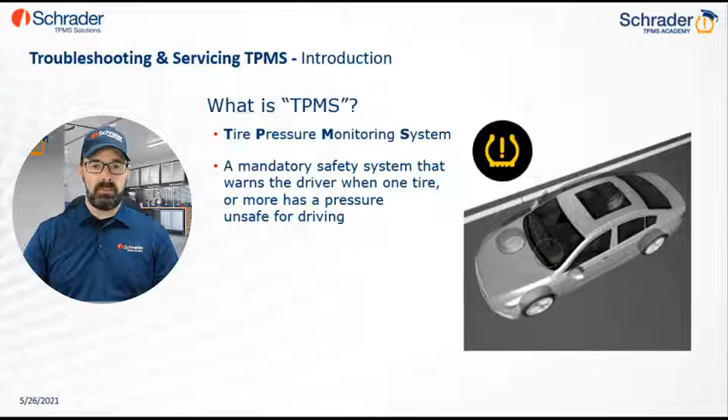As mentioned, it is a mandatory vehicle system, and it is mandated in the United States since 2007. What are the key points of that legislation for you? First of all, the legislation will target all passenger vehicles, light trucks, and buses under 10,000 pounds. Motorcycles and heavy-duty vehicles are excluded, but keep in mind that TPMS has proven its value to a point where we are seeing more and more motorcycles and heavy-duty vehicles now equipped with TPMS, even though it's not mandatory for that type of vehicle. The vehicle must be equipped with TPMS for all 4 tires.

The spare tire is not required. Again, it's not because it's not legislated that it doesn't exist. So keep in mind that some vehicles may have TPMS sensors in the spare tire, especially a vehicle with a full-size spare.

TPMS must alert the driver when there's a system malfunction, and a TPMS must detect and warn the driver when the tire pressure is too low, which of course is the goal of TPMS.

So how can you know? How can you identify which vehicle has TPMS? Let's say you have 2 cars in your shop, how can you know this one has TPMS and this one doesn't? Well, there's a few indicators that you can check. You can check with the vehicle year. So if you were paying attention for the last few seconds, you know that TPMS is mandatory in the United States since 2007.

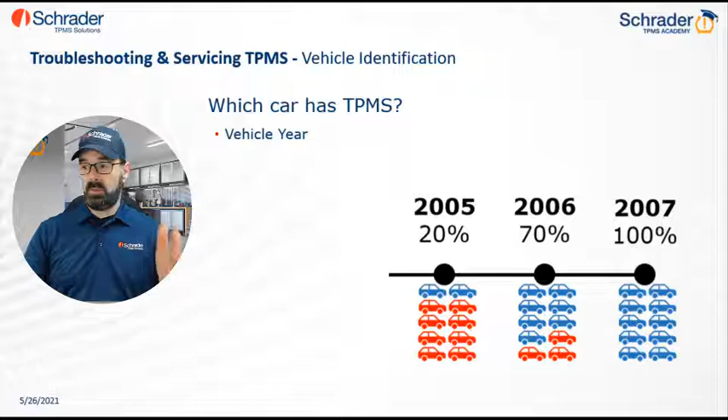So we can safely assume that any passenger vehicle built after September 2007 has TPMS. But what about vehicles built before that? Keep in mind the first car with TPMS was back in 1985. So between 1985 and 2007, how can you know which one has TPMS and which one doesn't?

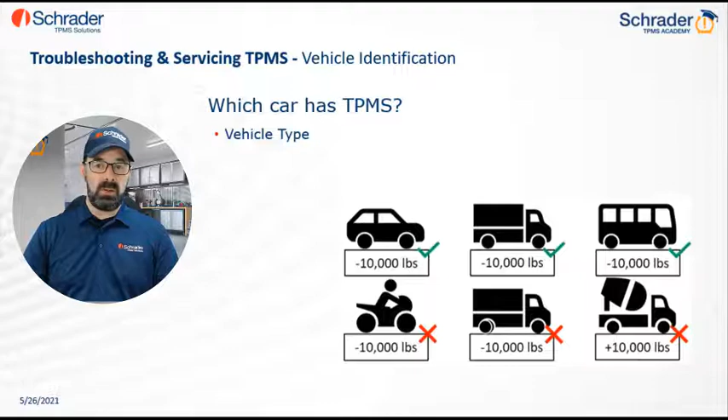You can also go by the vehicle type. So a mix of vehicle type and vehicle year will give you a good indicator. TPMS is mandatory for passenger cars, light trucks, and buses under 10,000 pounds. Motorcycles and heavy-duty vehicles are excluded, but we're starting to see more and more of these vehicles now equipped with TPMS.

So a good indicator would be the vehicle valve. Typically the valve is a good indicator. A metal stem valve will typically have a TPMS sensor attached to it, but some rubber stems also have a TPMS sensor attached. You just need to know how to recognize them.

Of these 3 types, the first type has a longer brass neck. By loosening the valve cap, you'll see the rubber doesn't extend all the way to the end of the thread - that's a good indicator there's a TPMS sensor attached. The second and third ones have a small rubber ridge, circular or longitudinal, directly on the rubber stem, which can also guide you. Seeing any of these 3 rubber stems is a good indicator.

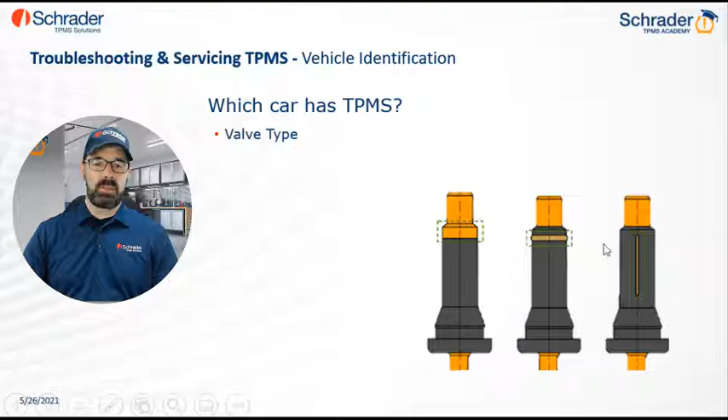But there's a better way. The most efficient and quickest way to identify if your vehicle is equipped with TPMS is to look at the dash. You want to look at the dashboard, and when you turn the ignition on, see if all the lights in your dash illuminate for a few seconds and then shut off. That's called the bulb check. You want to identify if there's a TPMS light during that bulb check.

If a TPMS light illuminates with all the other warning lights and then goes off, this means the vehicle is equipped with TPMS and the system is working properly. If the light stays on, or starts to flash, you'll want to write this down on your work order, because sometimes the client will claim the light was off before you started working on the vehicle, and if you haven't checked the light before, you're stuck with the problem now.

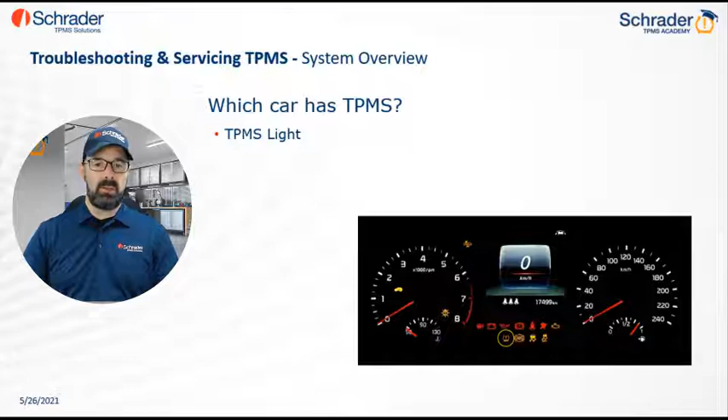All right, so that's for vehicle identification. Let's do a quick overview of how the system works. Now that you know that seeing the light in the dashboard tells you the vehicle is equipped with TPMS - but does it mean it has sensors in the wheel?

Not necessarily. What you need to know is there are 2 types of TPMS systems: direct TPMS and indirect TPMS. Let's start with direct TPMS for this exercise. Here's how it works: the pressure sensors are installed in each of the tires, and the sensor's job is to transmit pressure, temperature, and sensor ID.

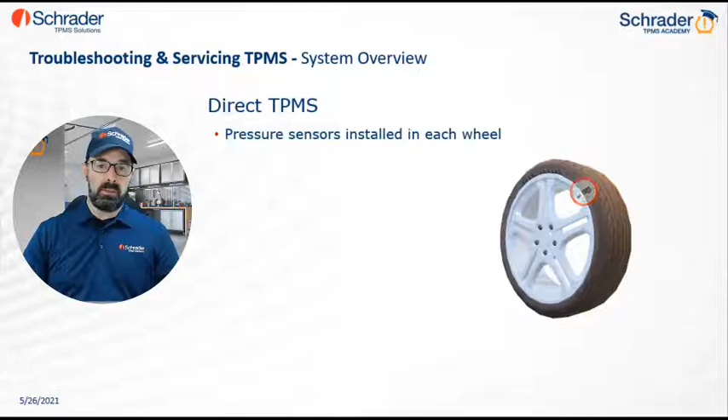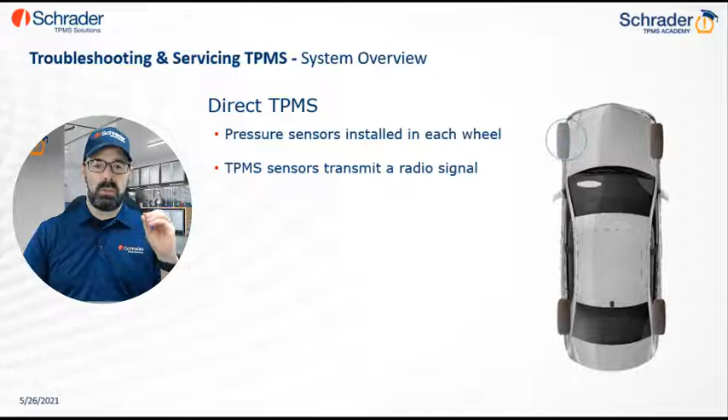The wheel of the vehicle is installed on the vehicle, of course, and when the sensor detects wheel rotation over a certain miles per hour, it will send a radio frequency to communicate the TPM data to the vehicle's receiver. The receiver gets the information and transfers it to your vehicle's ECU, the computer of the vehicle, which then displays that on your dash. So on your dash you'll have all the information, pressure by location - which wheel has 32 psi, which wheel has 33. That's how the system works.

Whenever the air pressure in one of your tires deflates rapidly, or if the pressure gets too low to a point where it's considered unsafe for driving, the sensor will send an alert to the computer in order to turn on the TPMS telltale, the solid TPMS light. But how much air do you need to lose in one tire to be considered unsafe for driving? The answer is 25% under the recommended tire pressure - that's when the sensor will send an alert to the computer to turn on the telltale.

That TPMS light, the solid TPMS light, is going to stay on, and it's going to stay on solid until the pressure in that tire is corrected.

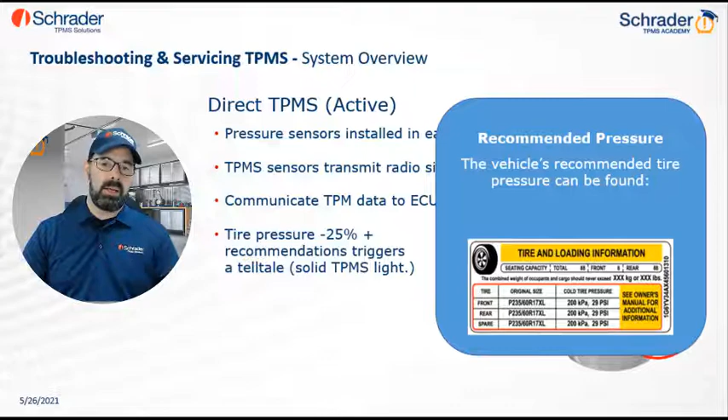Key information: 25% under the recommended pressure. But where can you find that recommendation? On your information placard, usually located on the driver door pillar - the same placard you would check to know the recommended tire size. That's where you'll find the recommended pressure for the vehicle, which is what the vehicle computer will set as a tire pressure expectation. So whenever the sensor reports pressure 25% under that 29 psi, the computer is programmed to illuminate the TPMS light on the dash.

And that's how it goes. Each sensor will transmit data every few minutes or so, and will continue to transmit unless the tire stops rotating. If the vehicle doesn't receive information from one or more sensors within a certain time frame, the vehicle will turn on the malfunction indicator light. It's the same telltale light, that same TPMS light, but it's going to flash instead of being solid.

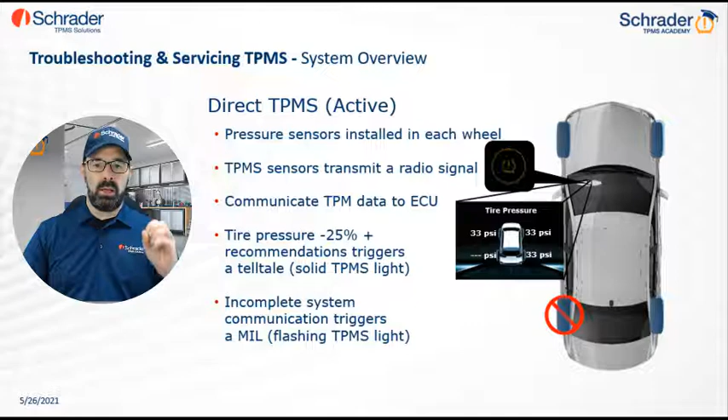Here's a trick: every time you turn the ignition on, the light will flash 60 to 90 seconds and then remain solid. So it's really important to look at the light at ignition. If you check the light 60 seconds too late, you might be missing important information.

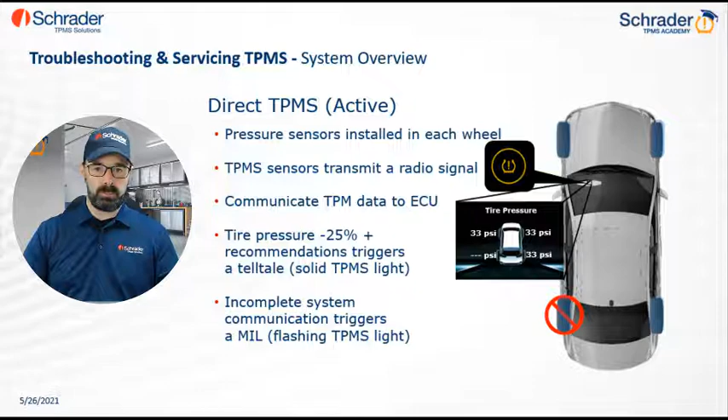That's for direct. Now for indirect. Indirect works on a different system - it works differently. There's no sensor installed in each wheel. The system uses the ABS speed sensor to estimate the pressure inside the tire. When the air pressure drops in one tire, the overall diameter of that wheel will slightly reduce to a point where that wheel will start to rotate faster than the other ones. When the ECU captures all that, it's able to understand that one wheel is rotating faster than the others. That's how the system will assume this tire is running low on air.

But it's the same light. It's a different TPMS system, but it uses the same light requirements: solid light if it's a pressure issue, and a flashing TPMS light if it's a system malfunction.

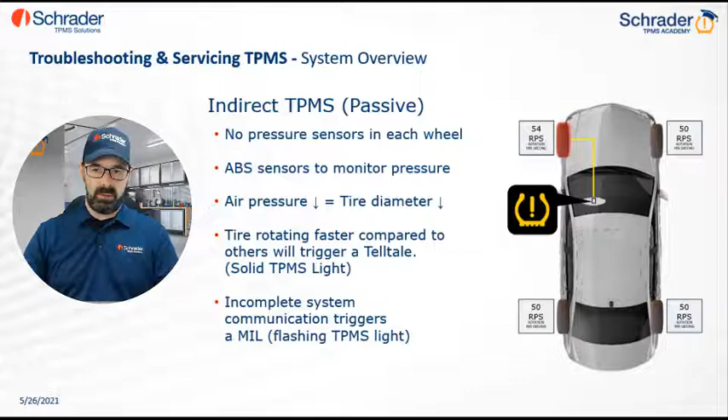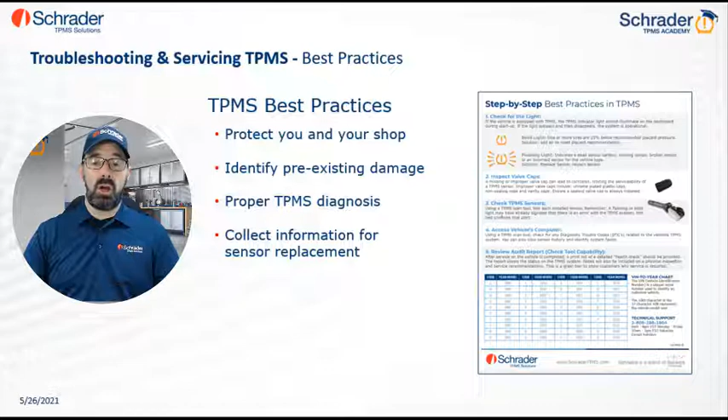So now that you guys have a better idea of how the system works and which vehicle has TPMS or not, I want you to go through a quick 5-point checklist that you should do before servicing the vehicle. This will protect you and your shop from liability. With that, you're going to be able to identify pre-existing damage, ensure that you inspect every aspect of the system, and ensure that you collect all the information you need if ever you need to replace a sensor.

And the first item on the checklist is exactly what we've just reviewed: check the light. When you turn the ignition on and all the lights in your dash go on, then off, that means it's a bulb check, meaning your vehicle is equipped with TPMS and the system is properly functioning. If the light turns on and stays solid, what you'll want to do is do a full ignition cycle again - off and then on - just to confirm the light is really solid and not flashing.

If it stays on solid, what you'll want to do is check the pressure value on your door placard, then check the pressure in the tire with your stick gauge. Don't forget to check that full-size spare - if the vehicle is equipped with a full-size spare, there's a strong chance it has TPMS sensors in the spare.

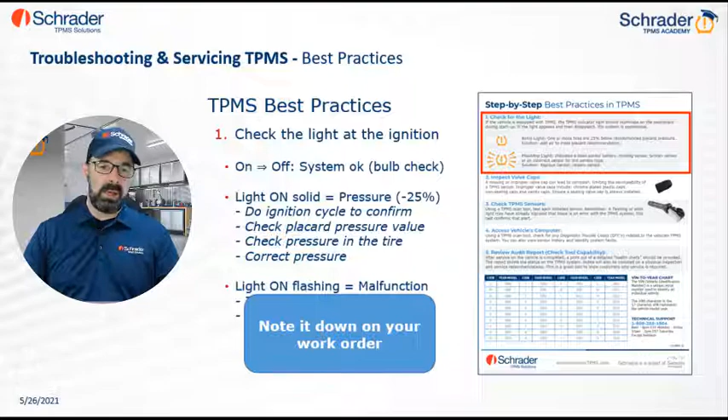If the light is on and starts to flash, then you know it's a system malfunction. In that case, test each of the sensors with your TPMS diagnostic tool. Of course, note everything on your work order - whatever it is, if it's system okay, solid light, or flashing light, write it down. This way you're protecting you and your shop from liability, and by notifying your client right away, you won't end up paying for something you didn't break.

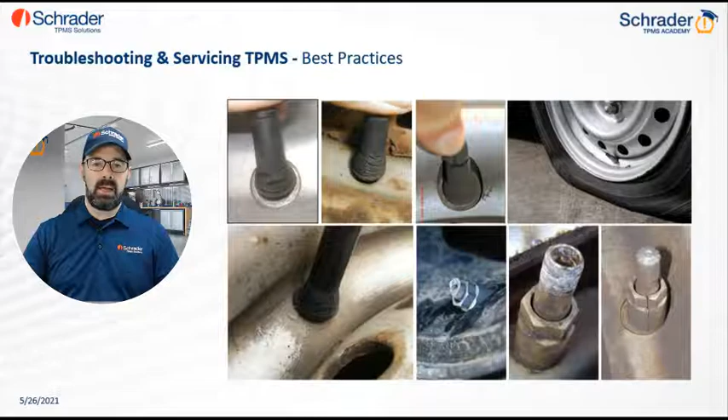Item number 2 on our checklist is check the valve. You want to be able to identify any pre-existing damage on that valve. I'm sure everyone here has seen these situations a few times - corroded valve stems or cracked rubber stems. The worst part is that in many cases, these situations are caused by someone, somewhere, or some other shop that did not service the valve the last time they serviced the tire. Guys, I cannot stress this enough: the valve stem needs to be serviced every time you break a wheel and tire.

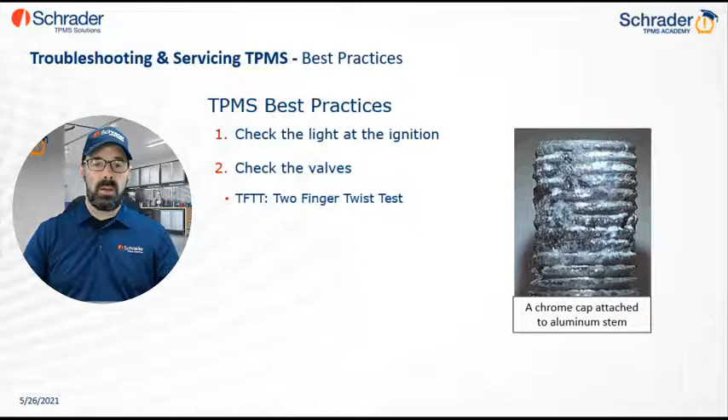With the sun and the heat, the rubber on that valve stem will dry out and crack. It needs to be replaced every time you break down a wheel and tire. The aluminum valve stem can corrode to a point where all the components inside get seized and bond together. And if the car is equipped with a one-piece fixed angle valve, if you break the valve stem on that, it means you need to replace the whole sensor unit.

What you want to do is identify any pre-existing damage. You'll know right away just by looking at the valve which one is going to give you a hard time. You're not just collecting information on your work order, you're protecting you and your shop from liability of any pre-existing damage.

Start with a 2-finger twist test. If you can't get out that valve cap with just 2 fingers, stop right there. Don't reach out for that plier. Instead, go see your customer and tell him that the fancy chrome plated cap he installed on his valve has now created galvanic corrosion with the metal, and it's now seized. You'll try to remove it without breaking it, but let him know that if you break the valve stem, you might need to replace the whole sensor.

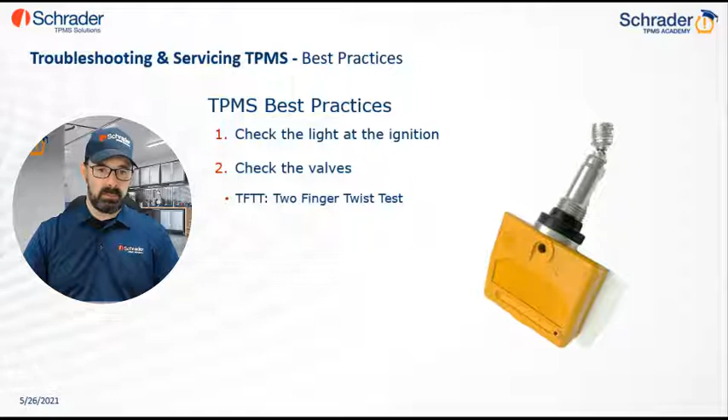Galvanic corrosion can also happen inside the valve stem. You get galvanic corrosion when you mix 2 dissimilar metals and add a little bit of heat, a little bit of moisture, some dirt in there. That's exactly what happens when you mix the wrong valve core with the wrong valve stem.

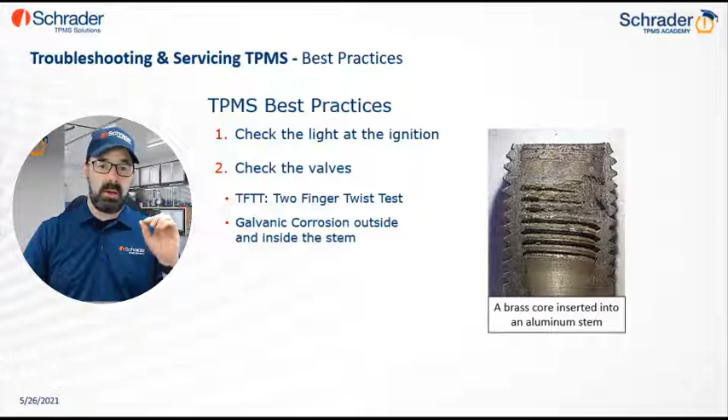There are 2 types of valve core: brass and nickel plated. The rubber stems come with a brass core. The aluminum stems come with a nickel-plated core. If you insert a brass core into an aluminum stem, you'll get galvanic corrosion, and in just a few months you'll get galvanic corrosion. That means next time this customer comes to your shop, you'll have a problem getting that valve core out of the valve core chamber.

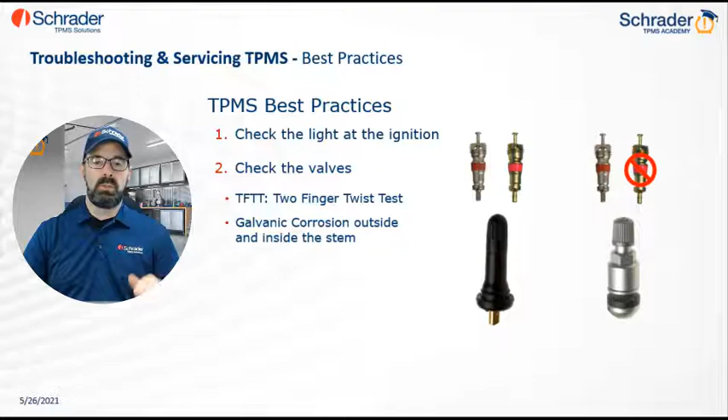You can avoid all that by using service kits. Replace all the wearable components of the valve every time you break down a wheel and tire.

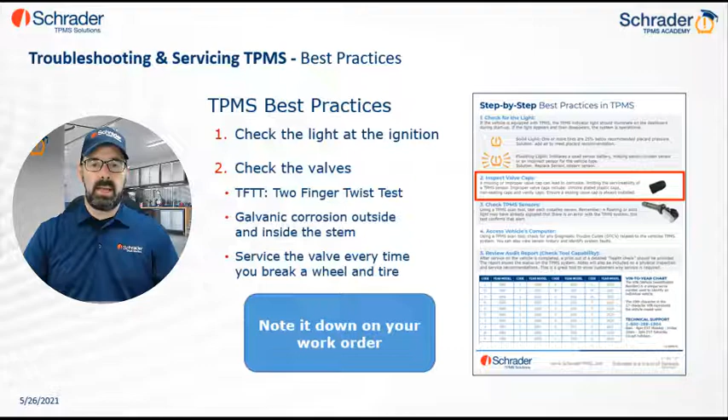So a quick recap on that second point on the checklist: check the rubber valve, check for pre-existing damage, check the valve cap, look for corrosion outside and inside, and check if you have the proper service kit in stock before dismounting the tire. Again, I'm going to sound like a broken record, but note everything down on your work order. If there's any pre-existing damage, write it down on your work order. Leave a trace.

Third item on our checklist is check the sensor. Just like you check for pre-existing damage with the valve, you want to check for pre-existing sensor malfunction from inside the tire. For that, you're going to need your TPMS diagnostic tool.

You take your diagnostic tool and set it to the right make, model, and year. Now, I know what you're going to say - you're going to say, come on Nick, that's easy to do, anyone can do that. Wait a second, don't get too excited.

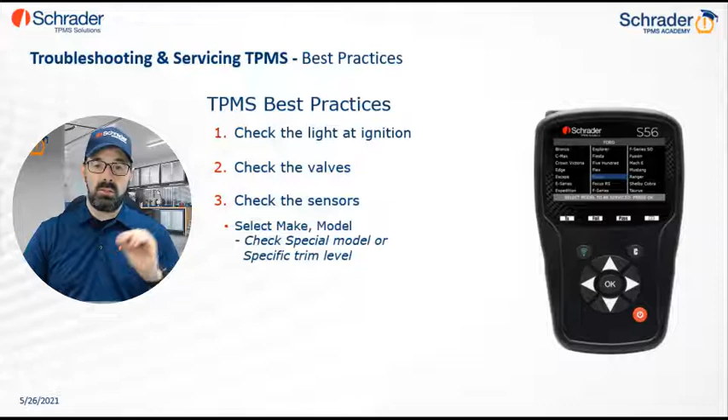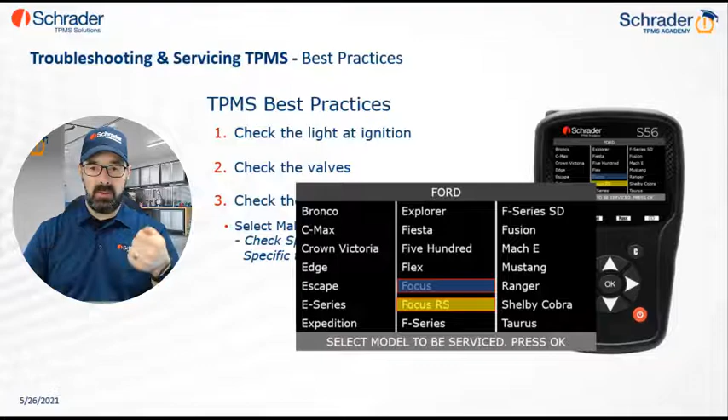When you look up a vehicle on your tool's database, every piece of information counts. You've got to be careful when selecting the model. A special edition or different trim level within the same model year can sometimes use a totally different TPMS sensor requirement. If your tool lists a special edition or different trim level on a separate line, like the example we have here, chances are the Focus and the Focus RS are using two different sensor protocols, so you cannot mix one with the other. If you try to scan a Focus with your tool set as a Focus RS, it's not going to work.

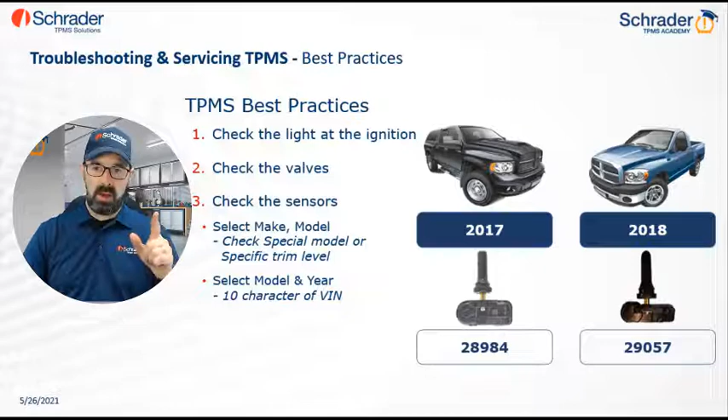So for that, you should not rely only on the information on your work order or what your customer is telling you. He might have purchased that car in 2018, but the car is actually a 2017. Always validate the model year with the 10th character of your VIN - only the 10th character of your VIN will give you the right model year for that vehicle. So if you've selected the make, the model, and the year, validate with the 10th digit on your VIN.

If that wasn't enough, you also need to choose a qualifier. So you select make, model, year, and now you need to check: is it steel wheel or alloy wheel? Is it with tire fill alert or without tire fill alert? Is it US made or Japan made? That means that within the same production year, the company used 2 or even 3 different sensor protocols.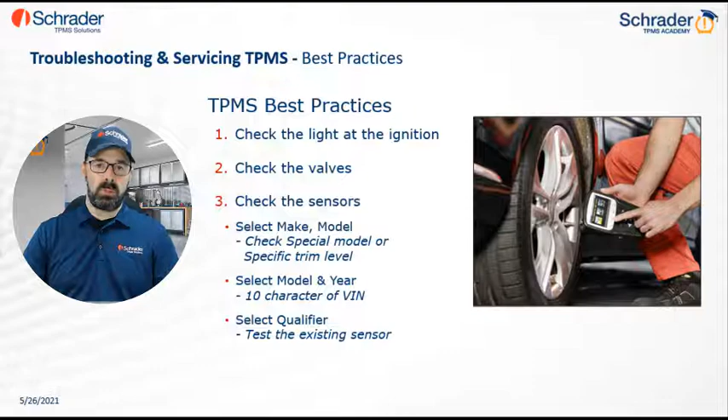The real question is, how can you tell? Can you really see through the tire and see that the sensor is a 315 or a 433 megahertz? The best way to know what protocol is used by the vehicle is to test the sensor. Test your sensor with your tool. If you're getting a reading with your tool on a specific protocol, you can safely assume that a new sensor programmed on that same protocol will work just fine.

Quick recap on the third item: check the sensors. You want to be able to identify any pre-existing damage, determine what's the right sensor protocol to use, and identify what is the right tool settings for that vehicle.

Again, write everything down in your work order. If there's any missing sensor, if the sensor didn't pick up the first time, if you have any specific settings that you need to put your tool on, what's the trim level, all that — I strongly suggest that you write everything down so you can avoid other situations afterwards.

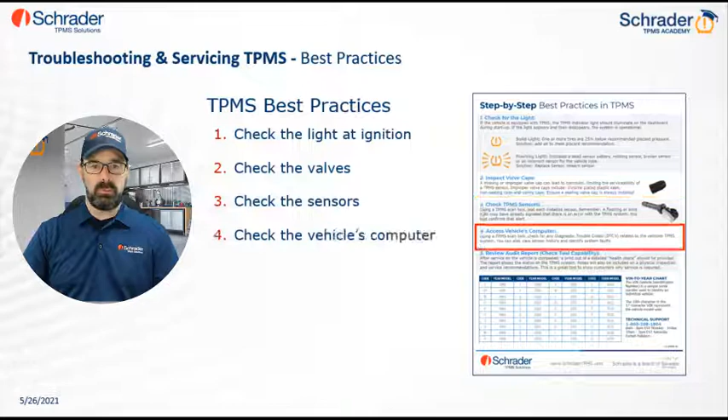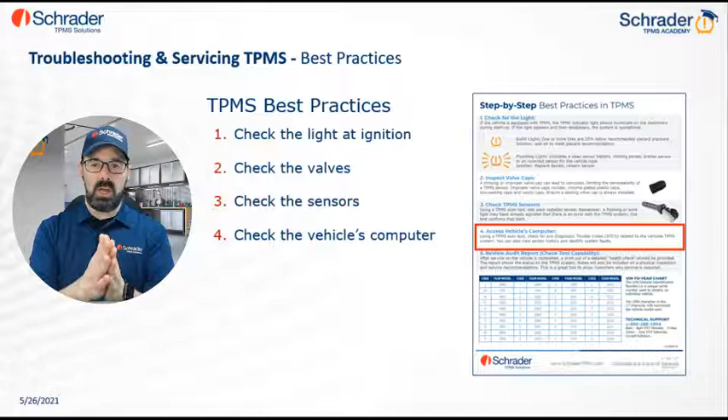Fourth item on the list is check the vehicle computer. This one is quite important, especially on a vehicle if your vehicle comes into your shop with a flashing TPMS light, with a malfunction indicator light.

I know what you're going to say. I bet you're all going, Nick, why do you want me to check the ECU if all I do is tire service? Again, we're keeping the same line of thought in — the checklist is to protect you and your shop from liability, any pre-existing situation. The key here is pre-existing situation. Failing to check the vehicle's computer can cause a situation where the client will think that you broke something, or will think that you haven't done your job properly.

And let me prove my point. Imagine the following scenario: client brings his car in for service, and he has a TPMS light. The TPMS light is flashing. So you use the checklist and you identify that the TPMS light is flashing, so you know it's a sensor malfunction. You check all 4 valves, so all 4 valves are okay. You know you'll be able to safely remove them without breaking it.

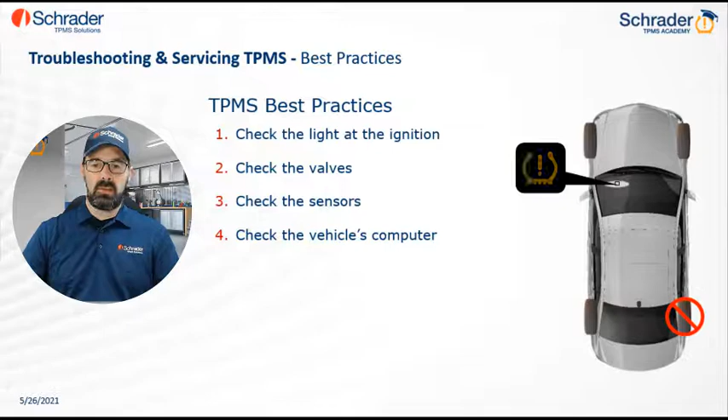So you take your TPMS tool and you test each sensor, and you identify that the front left isn't working. So you sell the job to your customer, replace that front left sensor, repair is done, customer leaves, everyone's happy. He then comes back the very next day with the same TPMS light on, flashing. So you test all 4 sensors again just to realize that the right rear sensor isn't working.

If you would have checked that computer, if you would have connected that TPMS tool to your computer, you would have seen that there were multiple DTCs recorded — multiple diagnostic trouble codes flagging the sensor malfunction on all 4 tires, meaning that the battery for all four of these sensors have reached their end of life. Usually all 4 OE sensors have been installed all on the same day, so if one sensor is starting to die on you, the other ones are following close by.

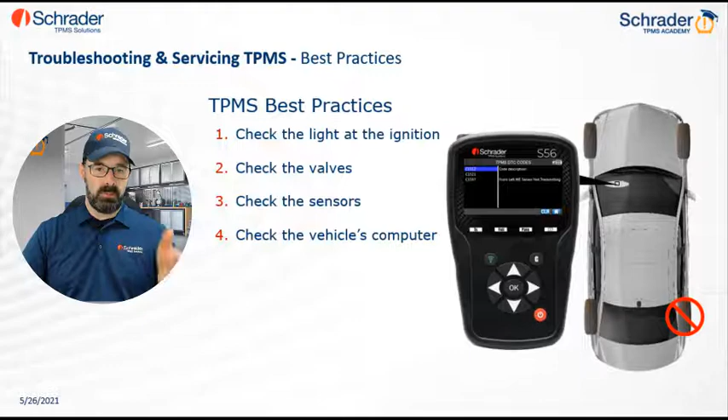Now, I'm not saying this is every time the same, that you should change all 4 sensors every time. But by retrieving the DTCs from the vehicle computer when a TPMS light is on, this will help you identify if there are other TPMS related issues that might not have been detected at the moment of service. So you'll be able to see if it has recorded any previous TPMS related issue.

Recap on that 4th item: check the vehicle computer for pre-existing sensor malfunction that cannot be detected at the time of service. Of course, just like all the other points, you want to write it down on your work order.

Because the 5th item on our list is exactly what you want to communicate to your customer. What recommendation do you have for your customer? Leave notes on your work order. If the client comes back, you'll have written information to refer to.

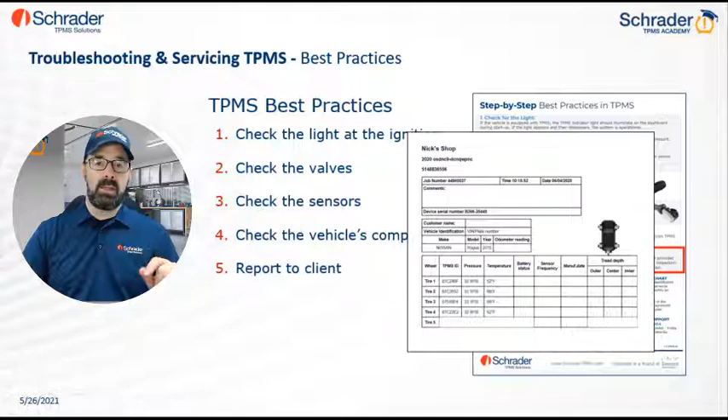There's even some tools that will offer you some printing features directly on your tool, either through a dedicated printer or through a PC connected on the same Wi-Fi network. These little reports, I'm telling you, are very handy, especially during tire changeover.

So that's a quick recap on our 5-step checklist. Check the light, solid or flashing. Check the valve for any pre-existing damage. Check the sensor, any missing sensor. Check the vehicle computer for any sensor malfunction recorded in the computer. And finally, report your findings to your client.

Now that you've done a full system diagnostic, you can determine if the sensor actually needs to be replaced. If it does, there are a few options available to you. All in all, you have 3 types of sensor. The main aspect that sets them apart is the vehicle application.

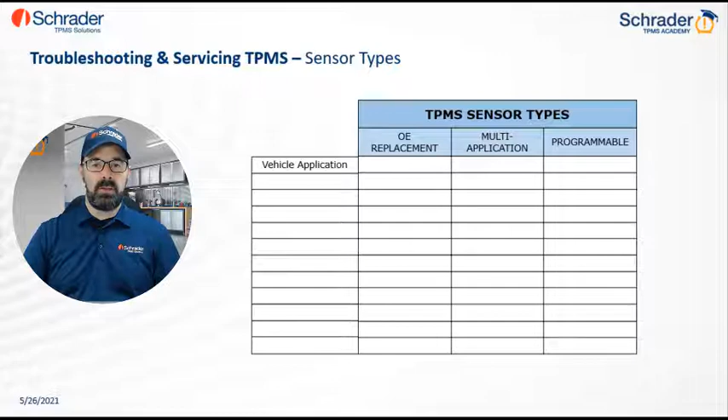Just so we're all on the same page, what is a vehicle application? Vehicle application, or vehicle protocol, you can visualize it as the language used by the sensor to communicate with the vehicle. Since every vehicle has different TPMS requirements, different applications will communicate with different vehicles. Therefore, when choosing or installing a new sensor, you need to make sure that this new sensor will speak the same language as the vehicle you're installing it on.

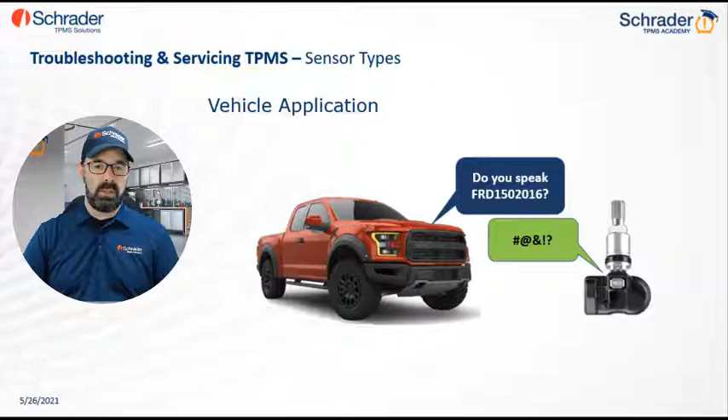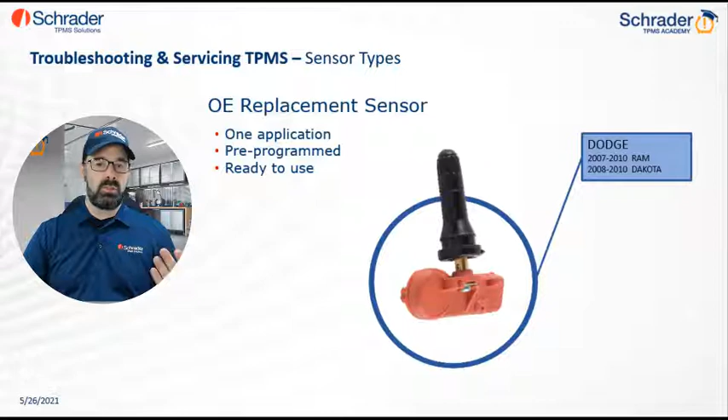So let's check that first type of sensor, OE replacement sensor, or OER, direct fit. This type of sensor is designed to replicate exactly what the OE sensor would do. It has one sensor protocol, one vehicle application already written on the sensor, and this type of sensor is set with only one application that cannot be changed. The sensor will transmit TPM data through the vehicle application so that it can only be decoded by a vehicle of a specific make, model, and year. The sensor is ready to use straight out of the box, and you just need to install it in the rim and mount your tire.

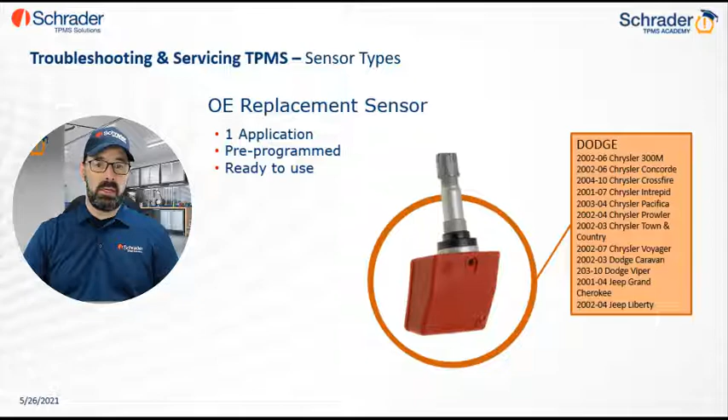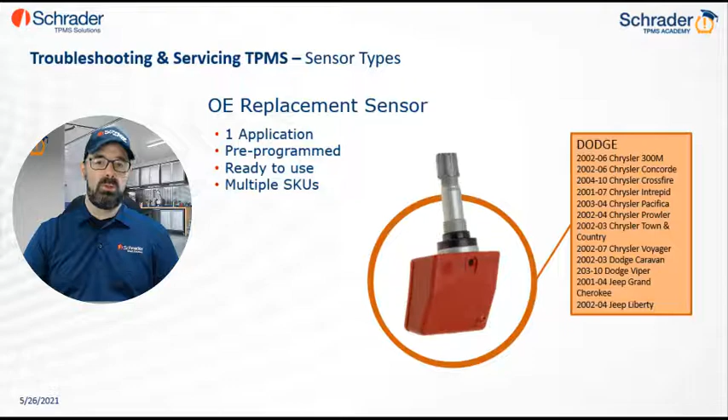But don't get me wrong. When I say only one application, it doesn't mean that it works on only one make and model. Some OE replacements, like the example that I have here, can be installed on quite a long list of model years. I've just copied a few here, but this means that all these vehicles are using pretty much the same sensor part number. But of course, if you want to keep OE replacements in stock, you'll need to keep many different SKUs in order to be ready for any vehicle that stops by your shop.

So, OE replacement sensor has only one vehicle application. It's ready to use straight out of the box, but to have maximum vehicle coverage, you need to keep many different part numbers in stock. What if we compare that with the multi-application sensors?

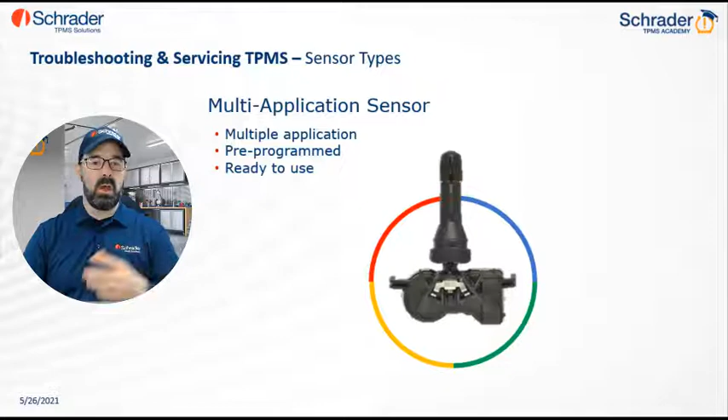Knowing that you can cover a few different models with one application, imagine if we put multiple applications onto the same sensor. That's exactly what you have with a multi-application sensor. You have multiple applications preloaded on the sensor, and the sensor will transmit each of these protocols in sequence. It's always going to transmit that same sequence over and over again. You can't really select which one you want, but the sensor will keep transmitting all these applications one after the other, over and over. Of course, that allows you to install that same sensor on a very long list of vehicles.

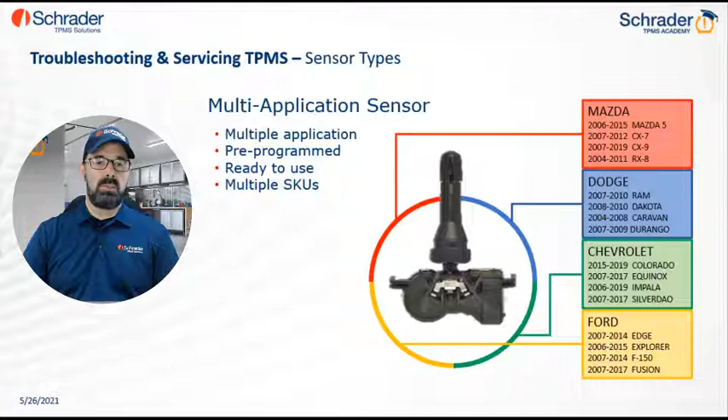But can you cover all vehicles with just one sensor? No. If you want to be ready for any vehicle that stops by your shop with multi-application sensors, you still need to keep a few different part numbers in stock. So multi-application sensors have a few vehicle applications preloaded. The sensor is ready to use straight out of the box, but in order to have maximum vehicle coverage, you still need to keep a few different part numbers in stock—a lot less than with an OE replacement sensor, but still some inventory to carry.

But this brings an interesting question: how many applications can you fit onto one sensor? Can you fit everything onto one sensor? Almost. Programmable sensor, or universal sensor—some people call them universal sensors because you can program pretty much anything onto that sensor.

Programmable sensor doesn't have any application at all preloaded. Instead, you have any application that you want available at your fingertips through your TPMS programming tool. There's practically no limit to the amount of applications you can have on a programming tool. All you need to do is transfer the application from the tool to the sensor. Once the vehicle application is transferred, the sensor is now ready to replicate exactly what the OE sensor would do. This allows you to have the sensor you want when you want it, with only one SKU, only one part number to keep in stock.

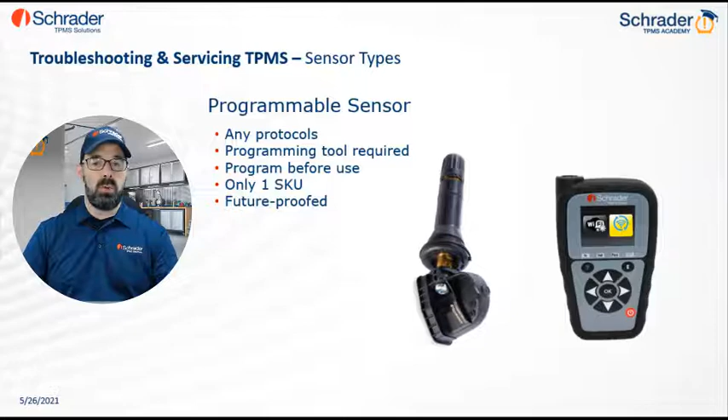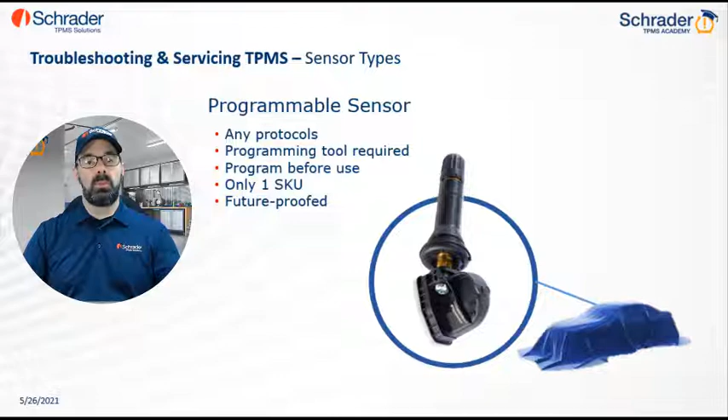In addition to that, programmable sensors are future-proof. What I mean by that is, by keeping your tool up to date, your tool will always receive the latest vehicle applications for new vehicles. So when a new vehicle is introduced on the market, even though you purchased that tool a few years ago, you're still going to be able to program a new sensor for that specific vehicle. But you need to keep your tool up to date.

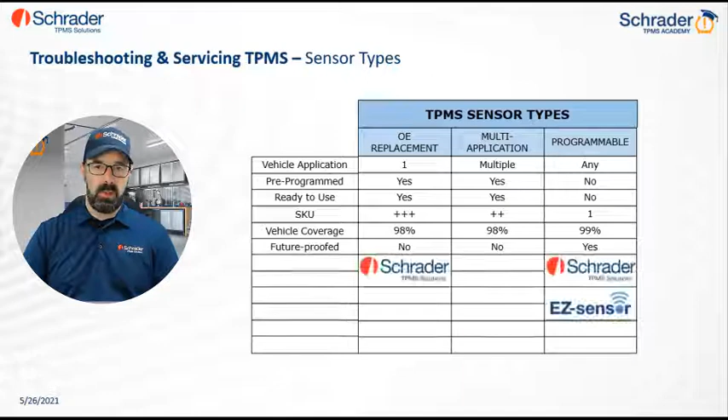Programmable sensor recap: it can be programmed for any application, but the application needs to be transferred from a TPMS programming tool. To have maximum vehicle coverage, you only need to keep one part number in stock, and programmable sensors are future-proof. Out of three different TPMS types, Schrader offers you two: an OE replacement sensor for more vehicle applications than you can think of, and our well-known OE quality programmable sensor, EZ-sensor, that covers 99% of vehicles in operation.

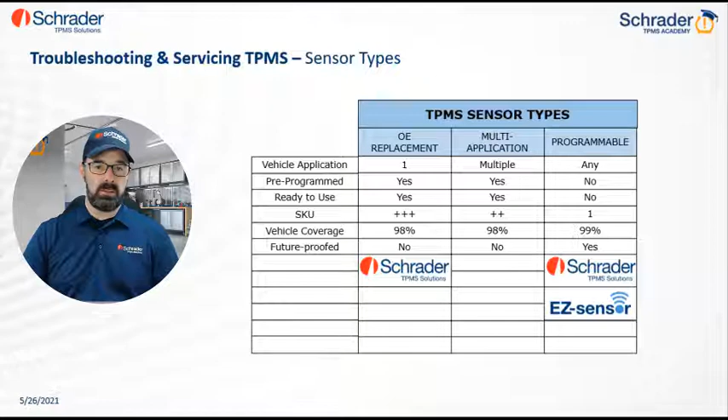But programming sensors and relearning are two completely different things. Let me show you how to program a sensor first. Programming a sensor is quite easy to do.

What you need to do first, as we've mentioned earlier, is select your vehicle. So you go here and select the sensor you want to program. You select EZ-sensor, and let's say we want to program a Dodge Ram 1500, any vehicle. Here you can see we have some qualifiers, DS or DT. Let's choose the first one here.

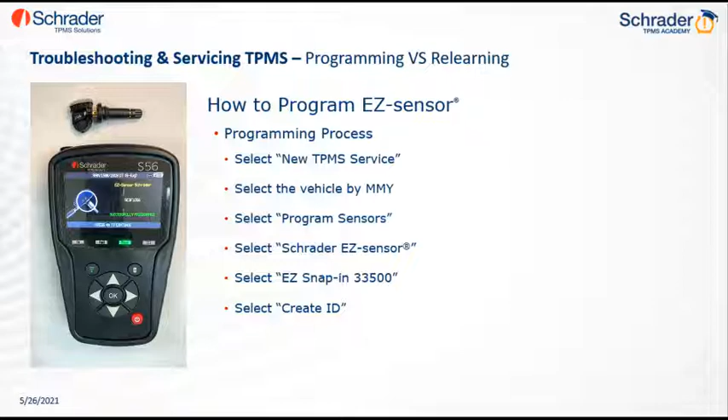With EZ-sensor, you want to place your sensor in front of the tool. You select Create a Sensor ID, and you're ready to program your sensor. You want to wait until the progress bar goes all the way to the end, and you get a confirmation sign with a little beep telling you the sensor is fully programmed. If you remove the sensor too quickly, you'll end up with a sensor that might not have received the full software in order to be programmed for that vehicle. So that's how you program an EZ-sensor.

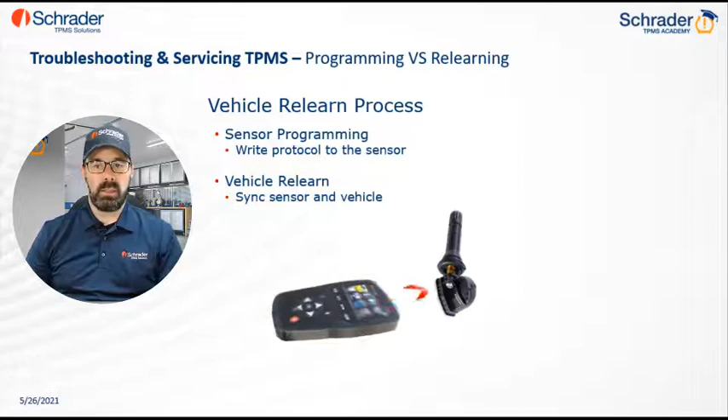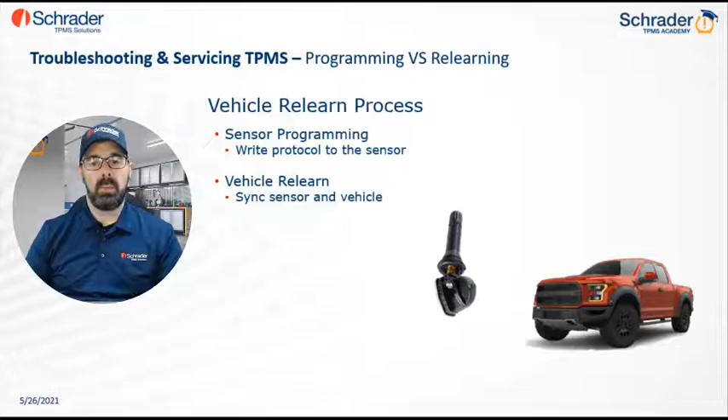Programming is the action of uploading the app code onto the sensor itself. So you're taking your tool and uploading the app code onto your sensor. After that, the sensor will communicate that code, which can only be understood by the vehicle you've selected, but the vehicle needs to accept that transmission. It's like pairing your phone to your car with Bluetooth - the car needs to get that virtual handshake in order to accept the transmission coming from that new sensor.

So here's how it works. To avoid signal interference with other vehicles, each sensor has its own ID. The vehicle needs to learn or record the ID of each sensor installed so it can ignore signals coming from other vehicles around. But when replacing a sensor, the technician needs to relearn that new sensor ID onto the vehicle, just like pairing your phone with your car on Bluetooth. The new sensor and the vehicle need to do that virtual handshake.

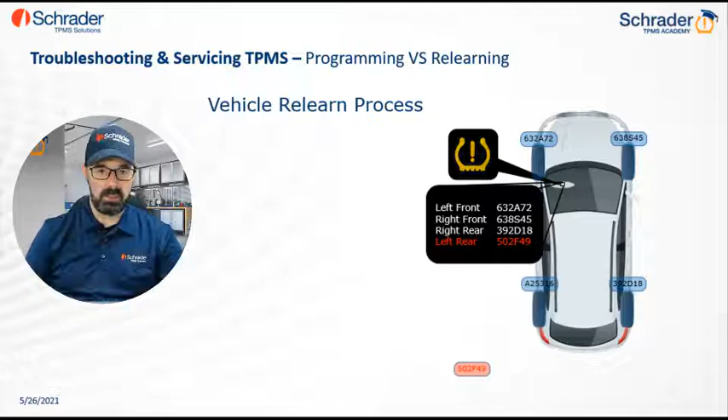That's why on your tool, every relearn process for every vehicle is documented. You just need to select the service menu and look up the vehicle. And here, guys, I'm telling you, I am begging you, read the procedure. Select the whole procedure and read it as it is on your tool. Take notes if you have to.

Keep in mind that there is no standard in the way you're doing relearn. Some will say you need to drive 15 minutes, others will say 12 minutes, others will say you need to connect to OBD, others will say you need to deflate. Do exactly what's written on your tool's procedure.

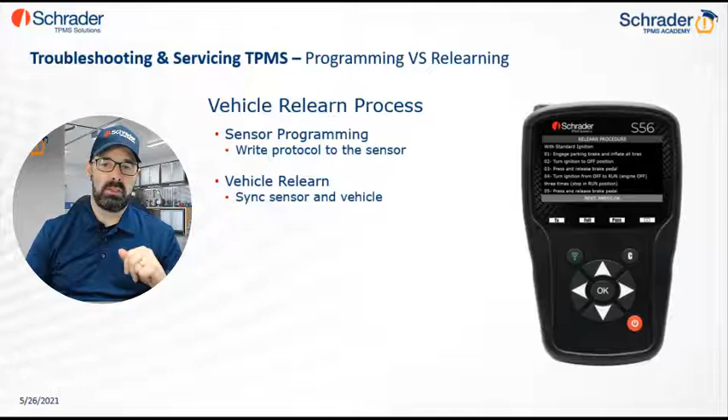And you see, when you look at the procedure, there's a little arrow at the bottom. This means there's more information - you need to press the down arrow to read it further. Read the procedure completely, and take notes if you have to.

People are saying that some vehicles are very hard to relearn, like Toyota. But if you read the procedure completely, you'll see that Toyota has very specific guidelines: you need to scan the sensor, then turn the ignition on and scan the sensor a second time, and some will even ask you to turn the engine on, running, and scan the sensor a third time. Read your procedure completely - don't assume that you know it all.

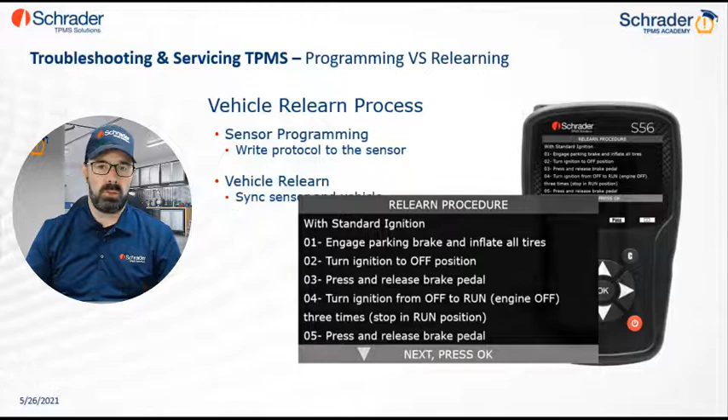Typically, there are three types of relearn: auto relearn, stationary, and OBD. Auto relearn is pretty easy to do - you just drive 15 minutes over 50. Read the procedure first and check how much time you need to drive and up to what speed. A certain speed for a certain amount of time is what gets the relearn to work on the vehicle.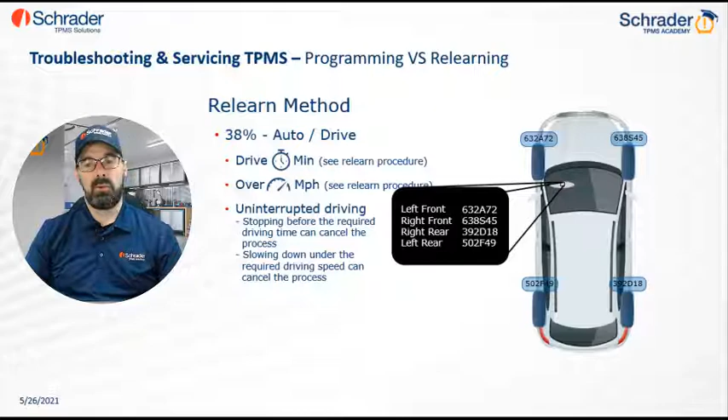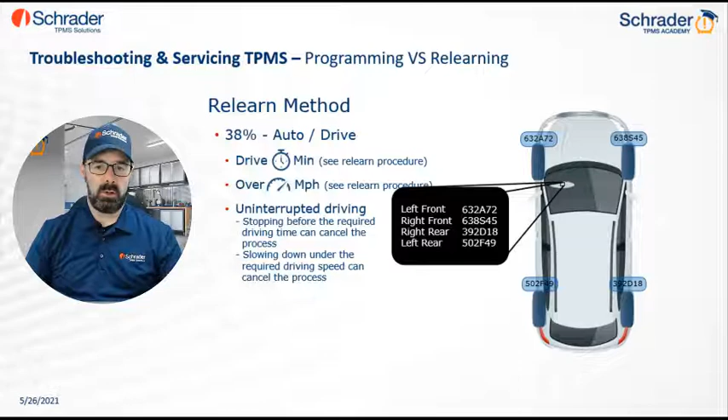What you need to keep in mind is it always needs to be uninterrupted driving. If it asks you to drive 15 minutes and you stop at a red light after 5 minutes, you're going to need to redo that whole relearn procedure again. That's why most tools recommend highway driving - this way you're not stopping every 2 minutes, and you're making sure you're driving over the speed limit required for relearn. So drive a certain number of minutes over a certain speed, and this is how the sensor will communicate with the vehicle to complete your relearn procedure.

Second relearn is stationary relearn. You probably have seen that in the past. You need to put your vehicle on relearn mode.

To do that, some vehicles will require you to press on the brake and cycle the key 3 times until you get the horn to chirp. Others need you to press on lock and unlock for 5 seconds. Others, it's through the instrument control. Look on your tool procedure and it will guide you on how to do it.

The key is you want to have that horn chirp, you want to have that vehicle turn into relearn mode. When it gets into relearn mode, take your activation tool and activate each sensor in sequence, respecting the sequence written on your tool. Usually left front, right front, right rear, and left rear, but there's always an exception, so check the procedure on your tool.

Every time you activate one sensor, you'll get the horn to chirp, giving you the cue that the vehicle has accepted that new sensor ID. So you need to take into consideration the order you need to do your scanning and the time limit. There's always a time limit in which you have to scan all 4 sensors in order to have the relearn completed successfully.

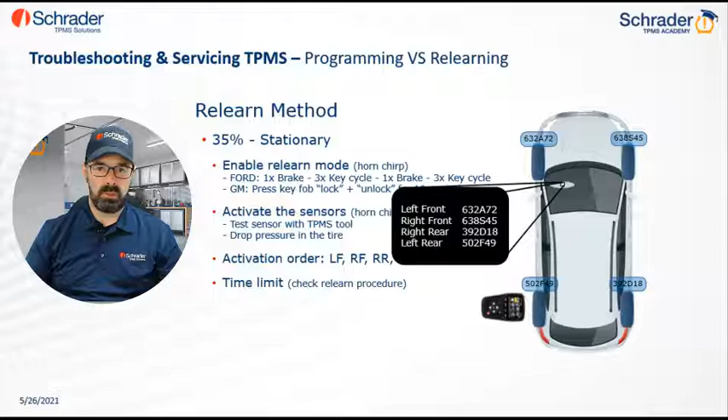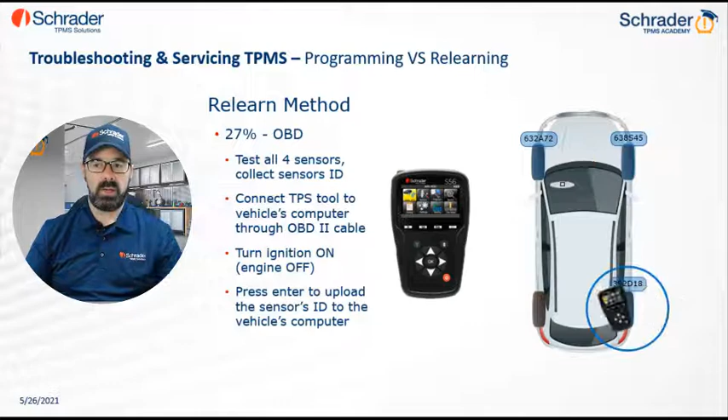The last one is OBD relearn. Everything is done through the tool. You collect all 4 sensor IDs with your tool. Sensor IDs are saved on the tool, and then by connecting your tool with an OBD cable, the tool will upload those new sensor IDs onto the vehicle.

This one can be a little tricky because you don't have confirmation that it works. I'll go even further: sometimes the tool will tell you relearn complete, but it's not complete. That's why it's really important to read that procedure. The tool will say relearn complete, but it's not complete. You actually need to unplug your tool and scan all 4 sensors again.

Like on a Honda, you need to unplug your tool, deflate the tire, re-inflate the tire, and then drive for 15 minutes. Mitsubishi will ask you to leave the tool connected but go scan the front left again. Please read your procedure - they all have these little differences from one model to another. There's no standard in how you should do a relearn.

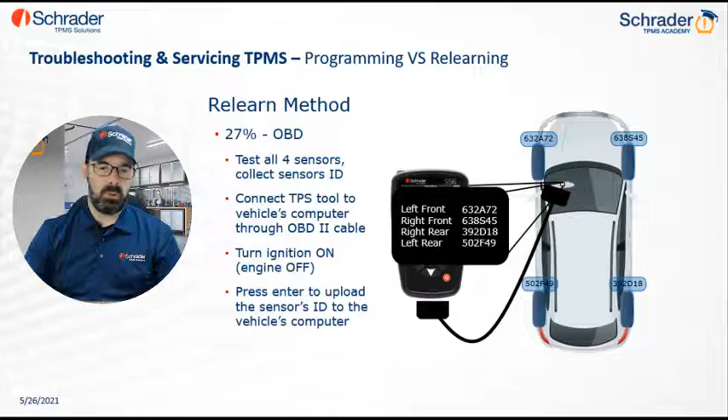Be specific, especially on OBD. Follow those steps, step by step, in order to have your relearn complete successfully. So that's how you proceed for relearning on a vehicle.

But what if you don't want to relearn? Because we get that question a lot. What if you don't have the time to drive 15 minutes over 15 miles per hour? Well, there is another procedure, which you got to be careful when you select that.

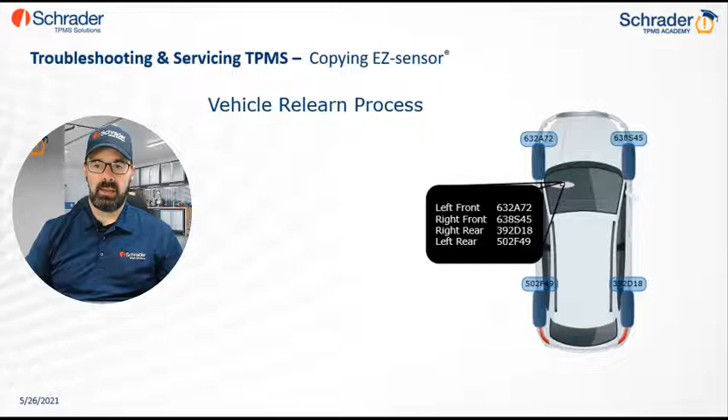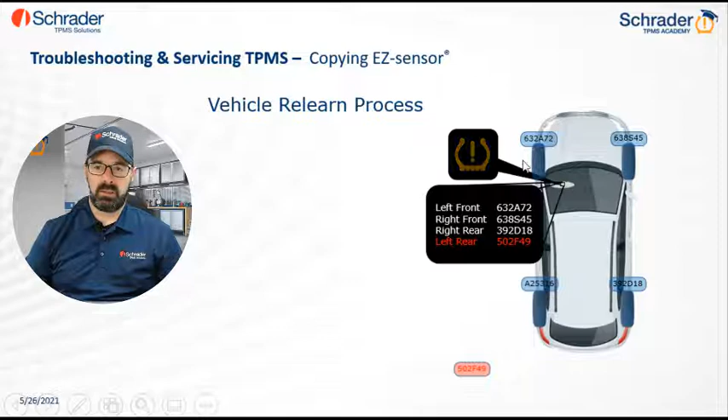So as you know, in the relearn process, every sensor has its own ID, and whenever you want to replace a sensor, you want to be able to relearn that new sensor ID to your vehicle. If not, you're going to just keep on getting a flashing light.

What if instead of doing that, when the sensor goes bad, you take your tool and read the old ID out of the sensor, then program a new sensor with that same ID. Let me run that animation again: an old sensor goes bad, you take your tool, read the sensor to get the old ID, put it onto a new sensor, and put that on the vehicle.

The vehicle will never know that you've changed a sensor. It's the same sensor with the right app code and the same sensor ID as it was before. The car will never understand that you've changed the sensor. That way, you don't need to do a relearn.

You got to be careful though, because you're never fully 100% sure that the process has completed successfully until you do a full road test and a full sequence of that TPMS transmission. Also, you need to have a working sensor in order to copy the old ID if you do a copy by activation, or you need to be able to retrieve the sensor ID from the car computer if you do a copy by OBD. But copying a sensor might get you out of some situations sometimes.

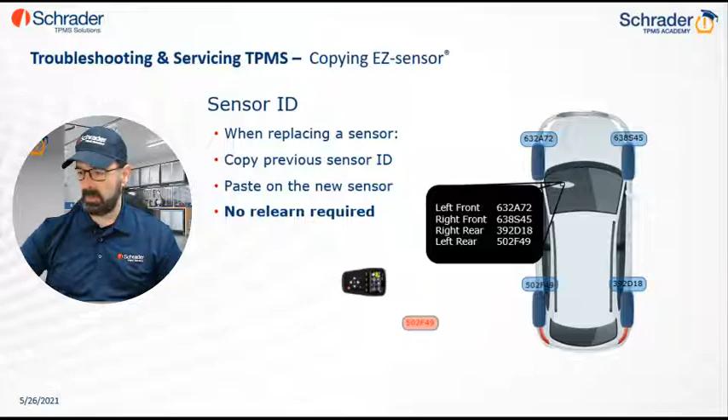So how would you copy a sensor ID? Pretty much the same process as programming a sensor.

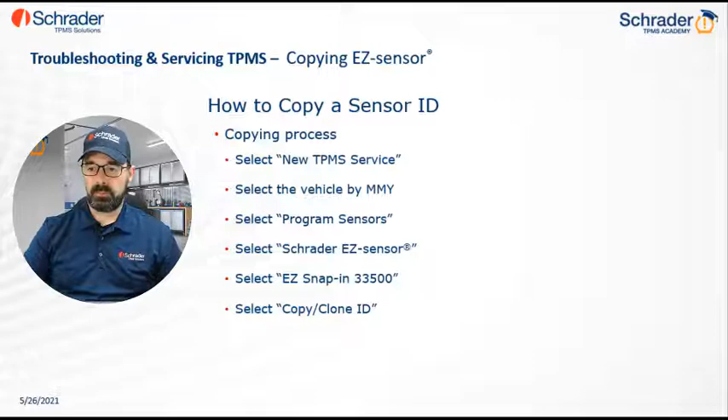All you need to do is choose your make, model, and year. So I have an old sensor here from the Mitsubishi, 2011. And the process is actually written on your tool.

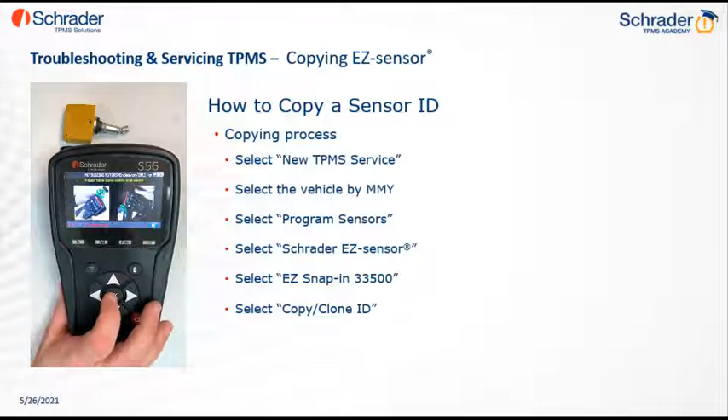You select Copy/Clone ID, and it tells you to place the original sensor in front of the tool. The tool will activate the sensor in order to get the sensor ID right here, and then you're ready to put on your new sensor in front.

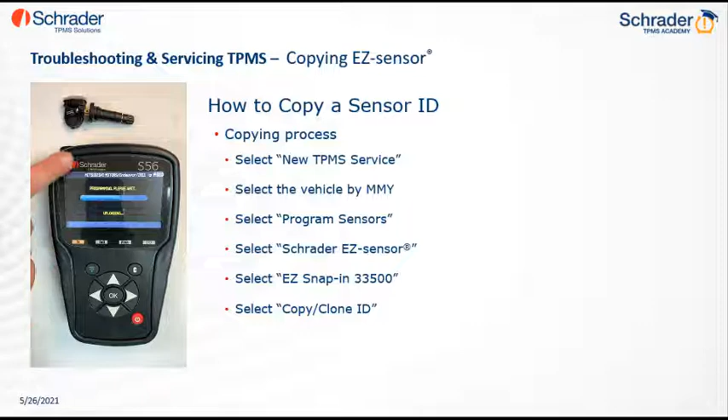Programmable sensor. Copying a sensor is done only with programmable sensors. You go here and you program that sensor. So now that programmable sensor will have the app code transferred from the tool, but also using the same sensor ID as we have written on that sensor.

So that's how you copy a sensor.